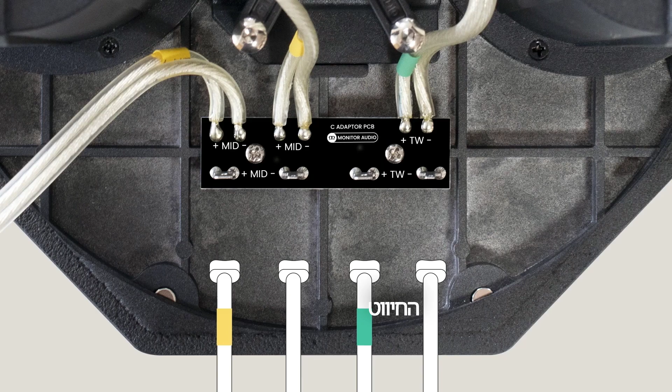Unplug the wires connecting the mid-tweeter array and the driver, and swap the wiring over inside the cabinet. Reconnect both the mid-tweeter array and driver to their respective wiring.

For vertical installs, insert both the mid-tweeter array and driver and tighten the bolt. For horizontal installs, turn the mid-tweeter array clockwise 90 degrees, then insert and tighten the bolt.

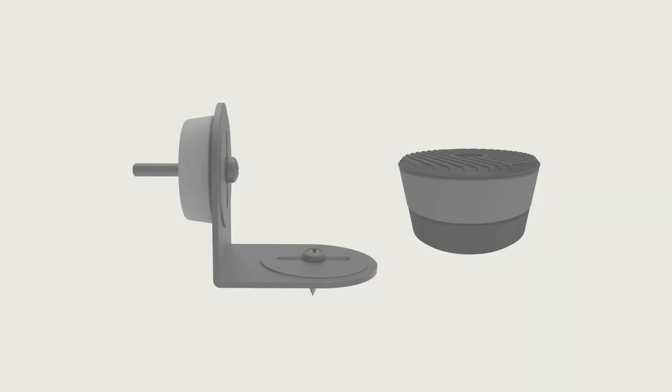The Cinergy range features isolating brackets to prevent vibrations against the stud wall. Using the supplied template, mark the holes on the floor or constructed platform as instructed.

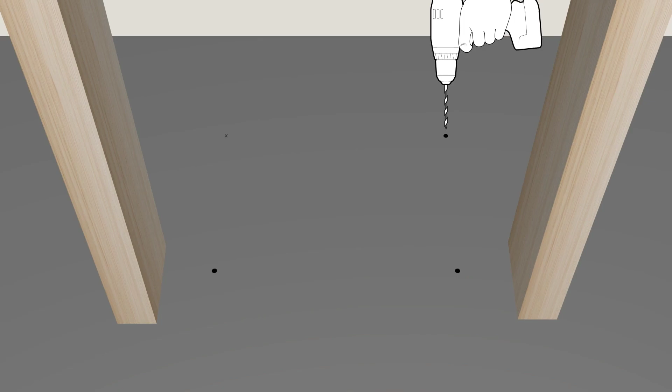Fix the locator bungs to the floor or constructed platform using screws. Fix the isolation feet to the speaker using the supplied bolts. Optionally, add the isolation pads down the sides of the speaker to further reduce vibrations.

Place the speaker into the stud, locating the isolation feet over the bungs. Use the handles in the cabinet to help lift it.

Align the brackets with the top of the speaker and the stud to mark a central point. Use this point to drill a pilot hole.

Fix the isolation brackets to the top of the cabinet with the screws and washers provided. Be sure to enable the brackets some movement by not tightening the screws too tight at this stage.

Insert the bracket isolator between the stud and the bracket, and use the washers provided and suitable screws to fix to the stud. Tighten your screws going into the speaker cabinet when you're happy with the positioning.

Depending on your wall covering, you can insert port bungs to isolate bass. Optionally, attach the grills provided.

For on-floor installations, you'll need to attach the supplied plinth using the 4 bolts supplied.

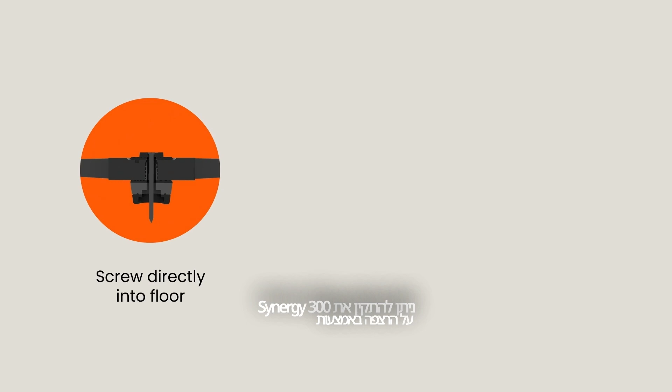You can install Cinergy 300 onto the floor using the isolation feet, either screwed directly into the floor or using the locator bungs provided. Alternatively, spikes are supplied for carpeted floors.

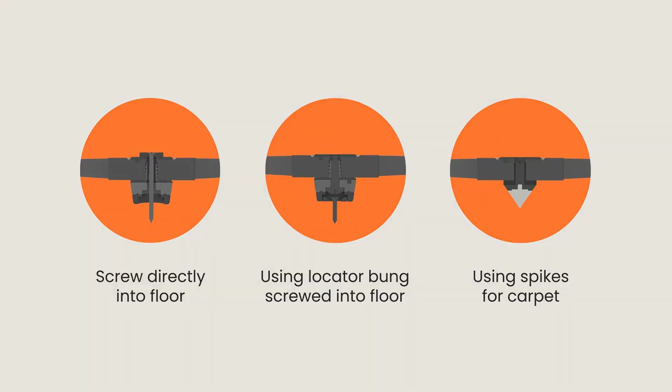For screwing Cinergy 300 directly into the floor, use the supplied template to mark and drill the holes in the floor.

Position Cinergy 300 with the plinth and isolation feet over the pre-drilled holes. Use suitable screws to fix it to the floor.

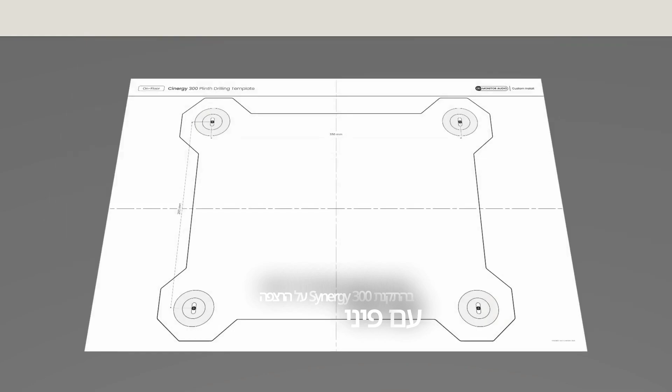When installing Cinergy 300 onto the floor using the locator bungs, use the supplied template to mark and drill the holes in the floor.

Screw the locator bungs into the pre-drilled holes. Use the bolts provided to attach the isolation feet to the plinth. Locate the isolation feet over the bungs.

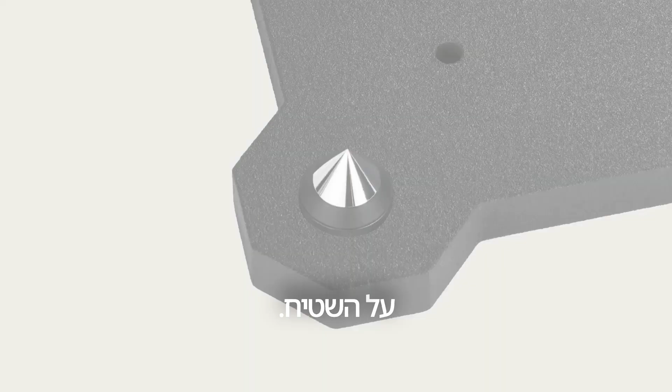If using Cinergy 300 on carpet, install the floor spikes into the plinth and place on the carpet. Optionally, attach the grills provided.